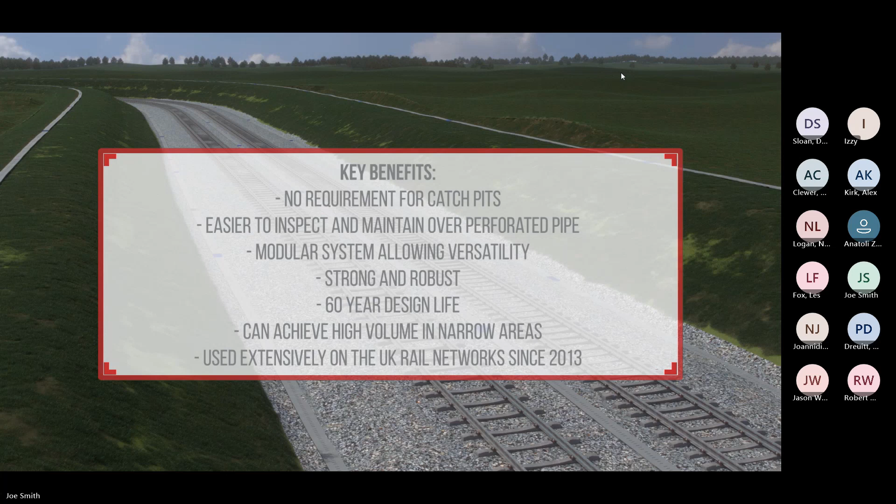Okay, so we go back to the main presentation. Did everybody get to see that little animation or that video? Yeah, assuming so.

Okay, so does everybody have that presentation screen back up now? Is that resharing now? Okay, great.

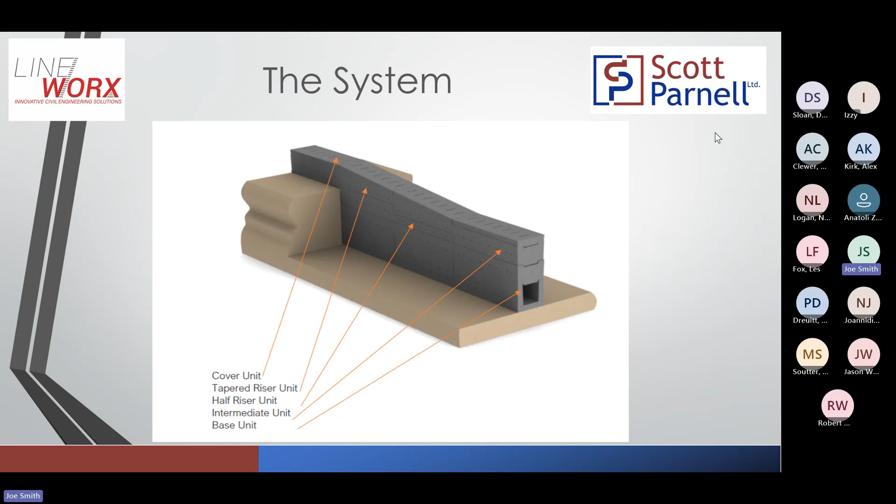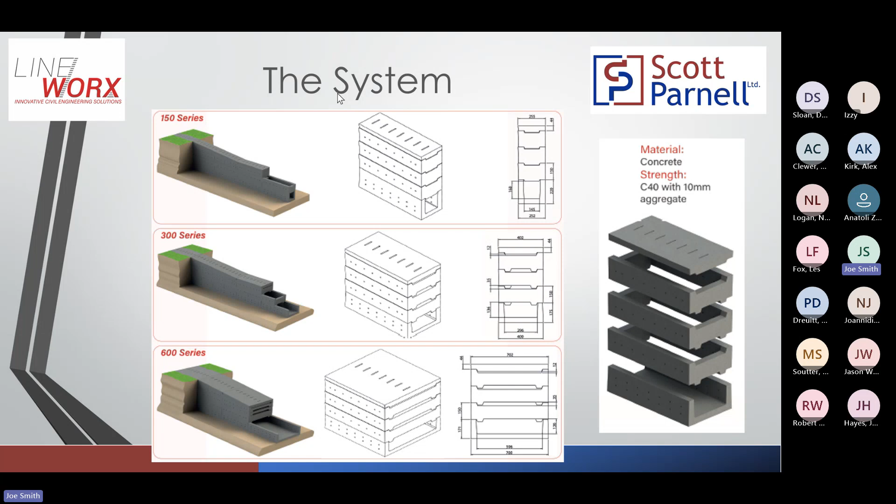So as I said, the system itself is made up of 3 different sizes. We have a 150 series, 300 series, and 600 series. And those sizes, if you zoom in enough, are roughly based around the internal width of the base unit, basically - 150, 300, 600, there or thereabouts.

The 150 and 300 series are very much manhandleable. The 600 series, pushing it a bit there - a base unit of the 600 series is about 50 kilos, so it's a two-man lift, or we'll go a few slides through and you'll see there's actual specific mechanical lifting aids for it. But as you see, it gives versatility in the system.

Depending on your flow rates and how much water you're trying to manage, you can move through those different sizes. If you've got narrow 6 foot stuff like that, you can pair up a 300 series and have a 150 series laying next to it. The system will still work and integrate with different sizes.

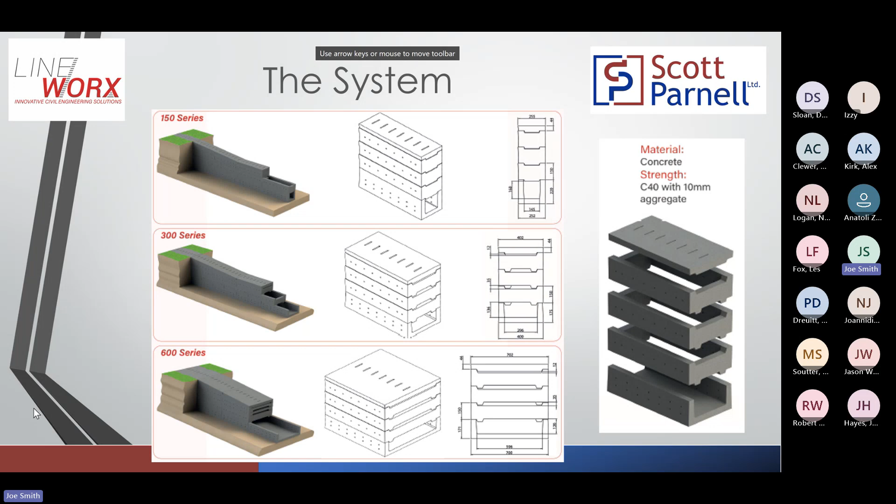The video touched on it briefly as well - the product benefits, easy to inspect and maintain over perforated pipe. They probably haven't seen much of this out on Network Rail infrastructure, but it is all over TfL infrastructure - DLR, London Underground, London Overground - they absolutely love it in their depots.

Because of the ease of inspection - if you imagine all the washer roads, all the cleaners pumping out into the drainage on the servicing sidings, blockages are common. Whereas with this, you're not trying to find that blockage within a 30-metre or 60-metre run of perforated pipe. You're essentially flipping a trough lid and moving your way down that drainage run. It's much easier to find where you've got a fault within that run. And when you find that fault or blockage, it's much easier to jet from that one spot, basically.

No requirement for catch pits. Rather than having to pair this channel, as you would with another channel or pipe, with an ACO catch pit or a Cubis catch pit and so on, it works very well in tight 6 foot height cesses through tunnel sections where you've got the corbels of your tunnel wall, because you don't need a separate catch pit in there. You can sink a base unit in deeper - so every 30 meters, 60 meters, whatever your design shows, you can put that base unit in deeper to act as your catch pit, then build your risers up from there.

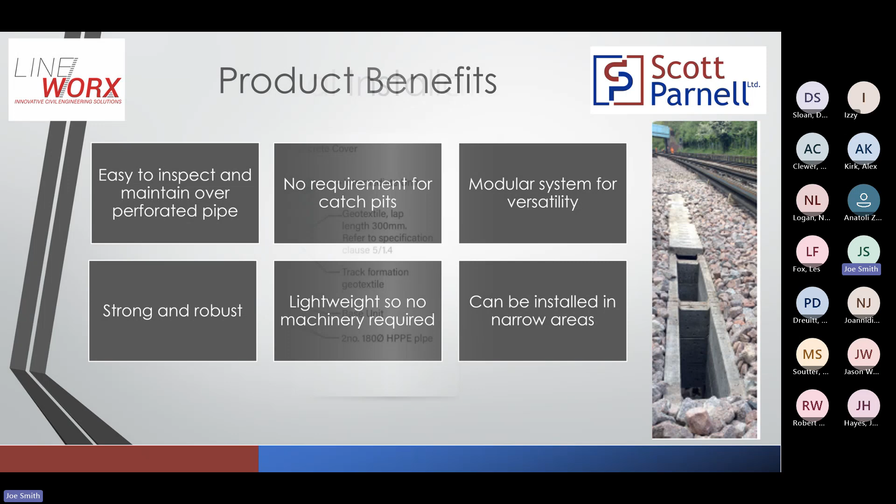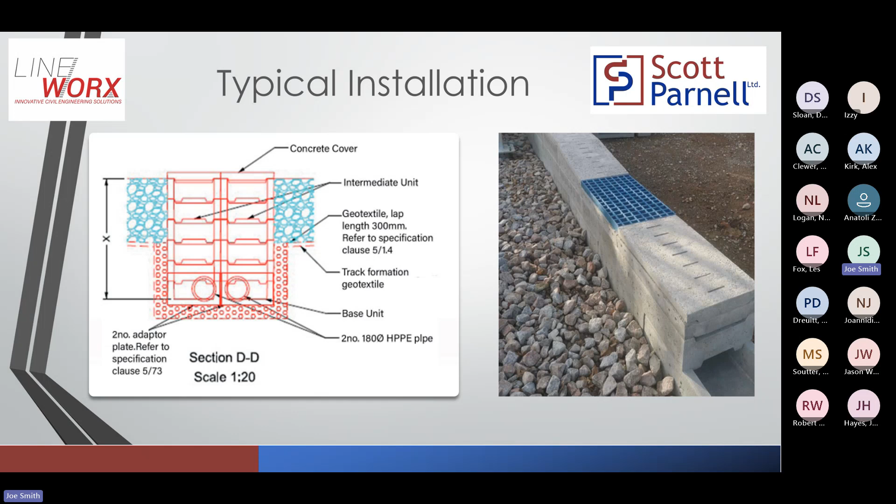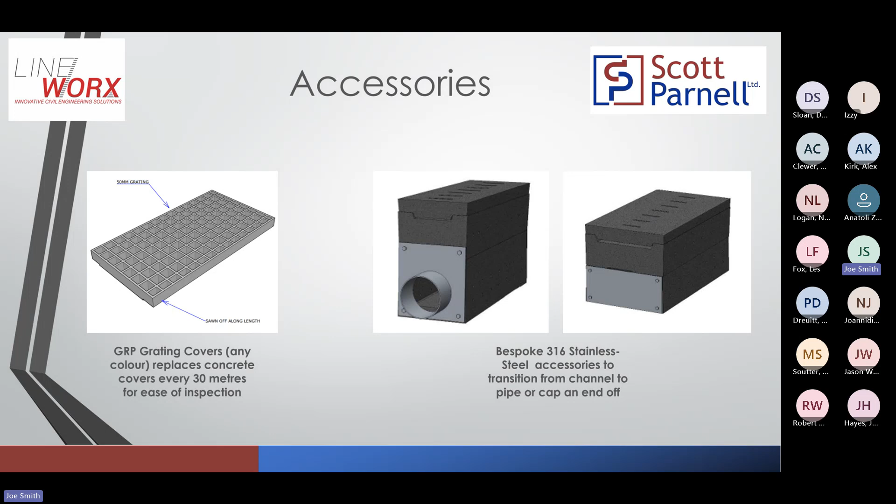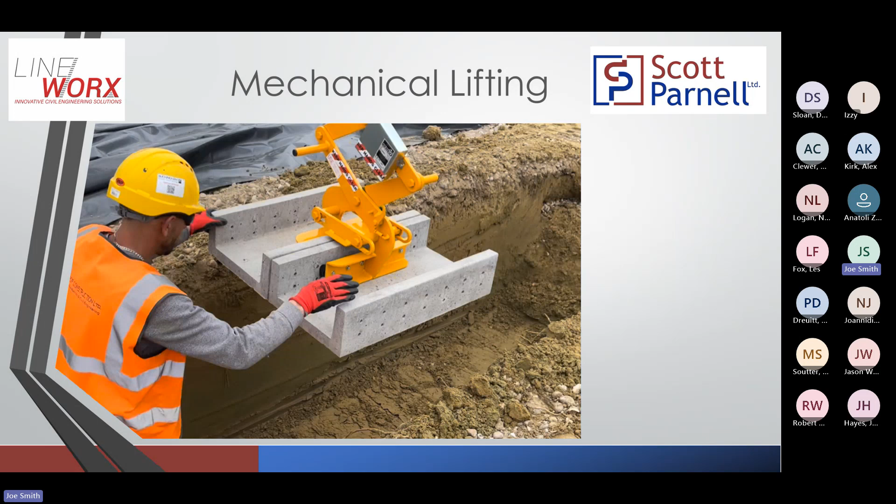So mechanical lifting - that scissor grab, kind of similar to a curb lifter, but that can be attached to either road rail plant or traditional track plant. Lineworx, or through us, when you come to install a run, will hire that to you on a basis during installation.

And then we just move on to a couple of slides that show the previous projects it's been installed on en masse. You'll see a lot of TfL projects.

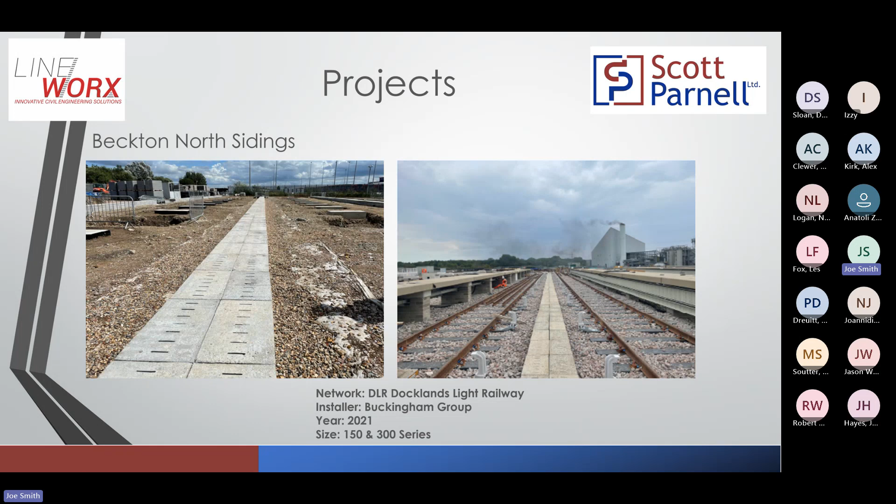Again, some more TfL stuff - London Underground here, job at Ruislip there. Again, you can see in those tight six-foots, especially in depots and through platform sections and tunnel sections where you've not got much between sleeper ends, it works really, really well. And you can't fit what would be hard to fit - a traditional catch pit - in there, because of the width and dimensions of it.

An example, some tunnel sections - Markbeech Tunnel down in Kent. They've done the six-foot there. I believe the cess drainage is still due to go in for Lineworx. Again, as you can see, tight between sleeper ends. Essentially the theory behind it is because it's a narrower channel and because you haven't got to put it as deep, your excavation doesn't need to be as wide as it was with traditional piping. So then you get into less arisings, less disposal, less backfill - you start to save a bit of cost when you look at things like that.

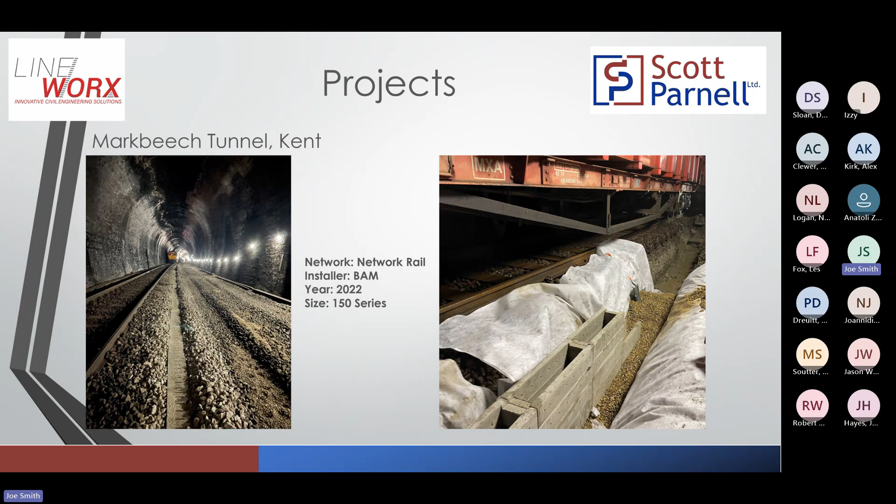And again, just a bit of a promo - this one really just to show who Lineworx have worked with previously. As you can see, most tier 1 contractors across quite a few different regions. It's been out there for 10+ years, really heavily used in TfL infrastructure. It's easy, it's spec'd regularly on design now. There's a push from us and others to get it utilised more on overground or network rail infrastructure, really, and it's starting to happen - there are projects out there using it.

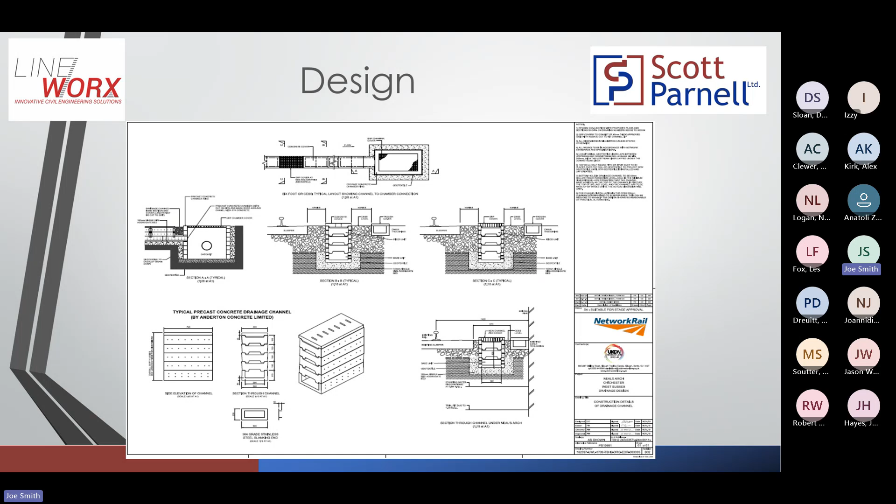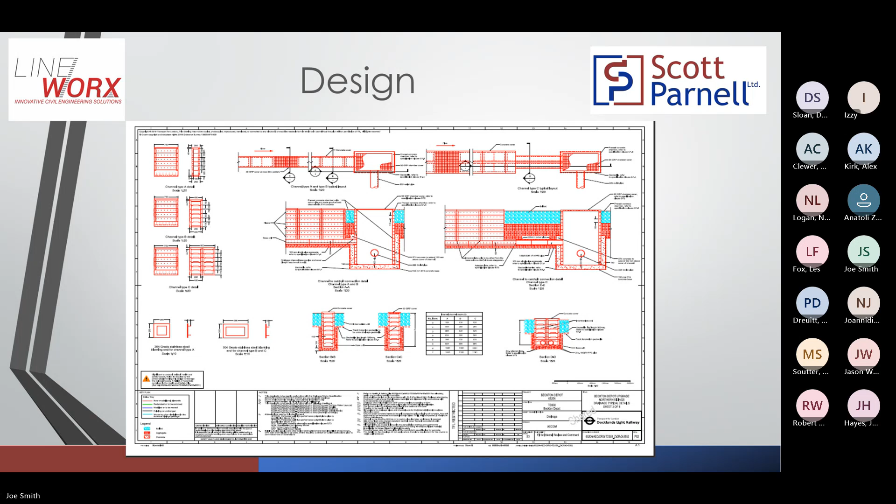And that's that - that's all I can tell you about Lineworx Concrete Drainage Channel.